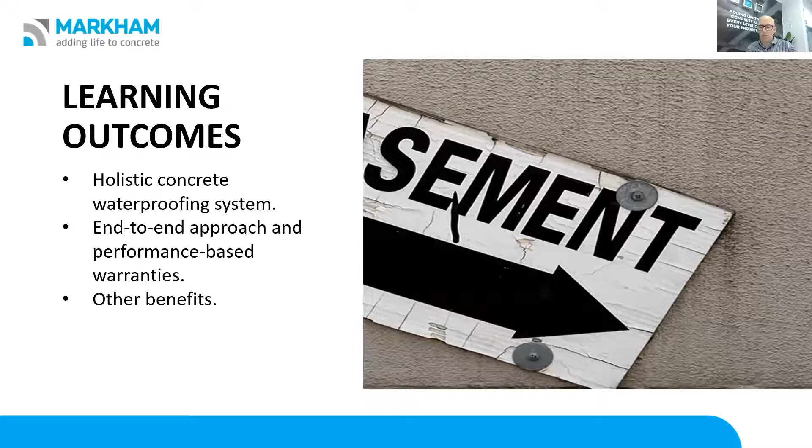So what we're going to talk about today, our learning outcomes will be about a holistic concrete waterproofing system, an end-to-end approach and performance-based warranties, and a few other little benefits there. So Hayden, take us away on some of the challenges we face in the market today.

Yeah, good. To be honest, and let's all be honest, waterproofing is challenging. It's a challenging topic. It's a challenging thing to get right. A lot of times in design, it's a small part of our design, a small part of our discussions. But as a project moves on and gets into its service life, it's often a big part of its remedial work and things like that. So we need to get it right from the start.

This topic's obviously all about basements, and with anything in the ground, we need to think about waterproofing. The cost of waterproofing is big for a start. So we want to put our investments into the right things that are going to give us the best return and best value. Traditional waterproofing systems are very labor intensive and very involved. They generally involve quite a few people, different parties, etc.

And remedial work's often hard to track down. I noticed a couple on the poll said that they've had issues, and I've seen it myself too. It's really hard to see where water's tracking in from and what's actually letting it in. Then there's the challenge of program timing, what's the right system for my build, these sort of things. So it is a challenging topic, and that's why we're here today.

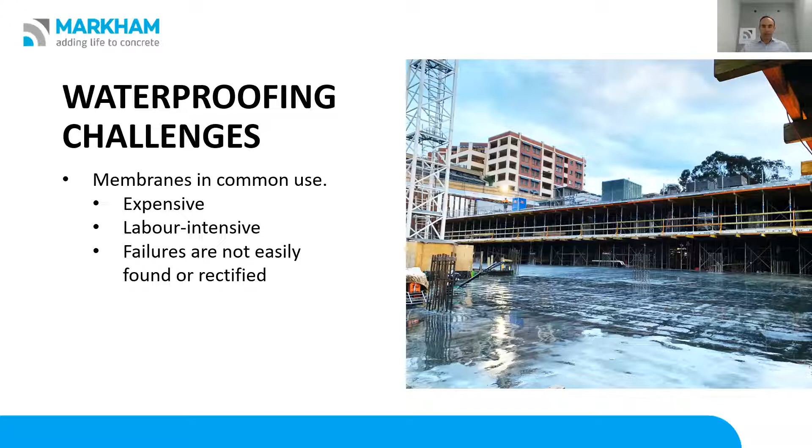So I just want to jump to the next slide. What we're going to show you here is a system which we call BASE-TECT. It's about protecting that basement, and about protecting the concrete itself. Traditionally you've got membranes underneath the slab and up the walls or around the piles, or on the sheet piling, things like that. Now, that is a challenge on its own.

With this one, we work on waterproofing the concrete itself. We're putting an admixture into the concrete, we are applying the surface, and then a simple system, as you can see in that photo, that blue line there, that's a gasket for any joints. That was probably a lift pit or something we were doing there. So that's the system we want to talk about, and it's all about saving you guys time and cost, but getting a warranty guaranteed result.

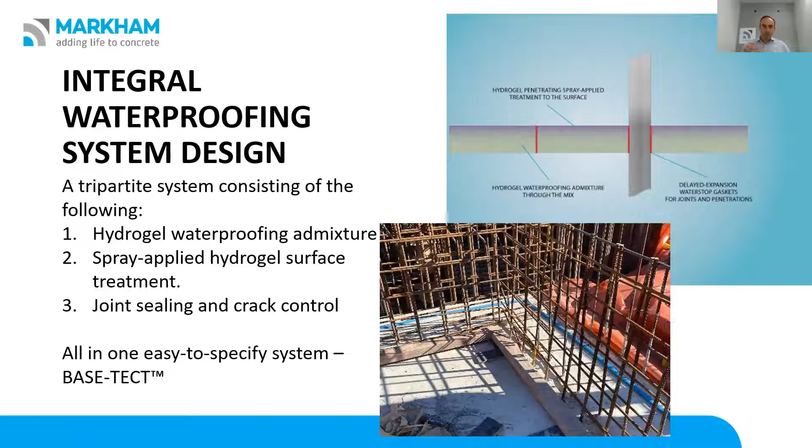So the system comes with a 25-year warranty, and it's very easy to put together from a site point of view, easy to design and easy to put together. So let's have a look at where it goes.

I just pulled up this project because, as you can see in that photo at the bottom there, you've got all the piles. It's quite a traditional type job. It's actually a little bit unique, this one, because they kept the house in the middle. Old heritage-listed project, so they need to protect that.

But see, traditionally you would have had to wrap a membrane all the way around those piles, or spray concrete on to get a blinding layer, and then put membrane over that, and then another layer of concrete. So with this project, what we were able to do is get involved with the team and waterproof the shotcrete wall, one straight run. Obviously, deal with your joints with gasket.

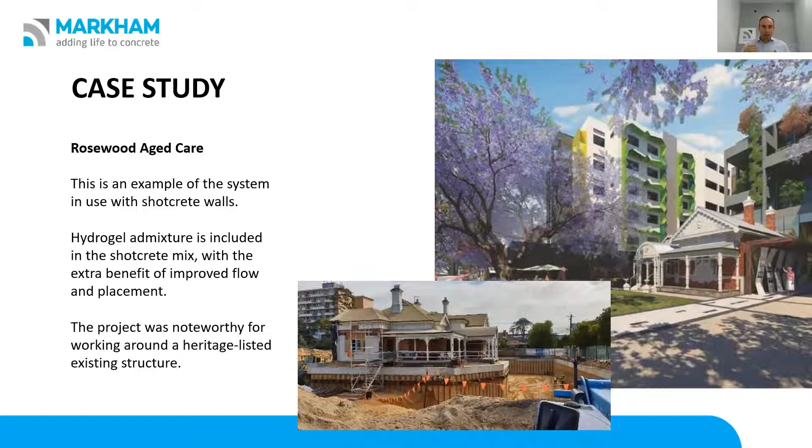Then you can do away with that membrane, and likewise with the slab, instead of having a membrane all the way through the slab and steel over it, we were able to waterproof the concrete, make that whole matrix. So that's one of the many, and I just brought that up to show you a little bit about what's available with this. So that's the system. Henry, you're going to dive in and show us a little bit about the technology.

Yeah, cool. Thanks. Yeah, so what we're talking about here is, I'm just getting some feedback from somebody.

That's right. So we're talking about hydrogel technology here. Some of you might have heard about crystalline admixtures. There's other admixtures out there. But today we're talking about the core value of the BASE-TECT system, which is hydrogel technology.

So it is a part of, or similar to, the calcium silicate hydrate process, which happens when concrete's curing. Basically, the moisture hydrates the cement particle. The cement grows little arms and tentacles out and grabs the aggregate, and that's how we get our concrete strength, or our grey matter of concrete as such. So hydrogels can be spray applied or mixed in at the premix plant, and we're not introducing anything foreign to concrete here that's not already in concrete.

So we'll cover it off a bit later, but that's how we can tick Green Star and different things like that. And basically, in all the research we've done over the last 25 years here at Markham, internally and externally with universities around the world, doctors in concrete, engineers, research labs, that sort of thing, the biggest conclusion we've found is that if you can prevent the movement of moisture in concrete, you can stop a lot of problems.

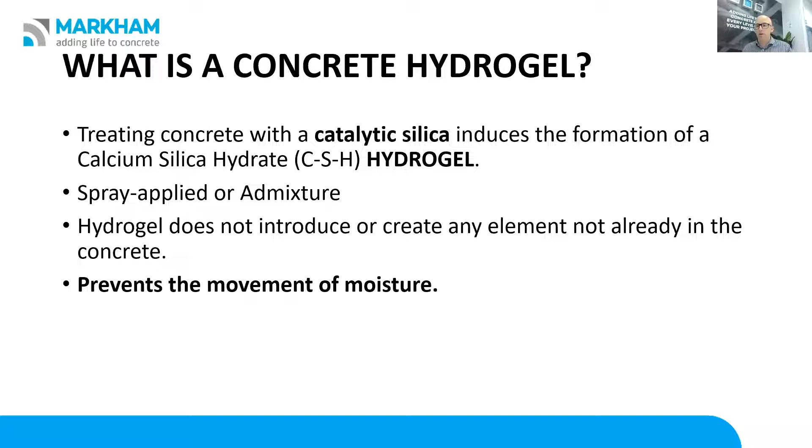So that's how, when we spray apply the treatments to the concrete surface, we can get deep penetration, filling all those voids and porosities and actually transforming the moisture in the concrete into another state. So moisture can no longer pass in and out of that concrete or come through the concrete to cause problems. So we can stop hydrostatic pressure as well. We've had testing up to about 50 meters of head pressure in the lab.

And there's a lot of projects out there that still stand the test of time today where we've done BASE-TECT below the water table, with no tank and membrane and that sort of thing. So hopefully that gives you a little bit of an overview on how hydrogels work. But is there anything more to add there, Hayden, before we move on to Green Star?

You're muted. Right.

I've used online platforms for 18 months and I still get caught by mute.

Beautiful. What I was thinking, there's a few engineers on the call, so the question's probably going through their mind: how does that affect my concrete? How does that affect my strength? Do I need more steel? These sort of things. So basically we can work with any mix and there's no negative effect on strength of concrete. I know a lot of admixtures will suck out the moisture and result in cracking and your strength dropping, things like that.

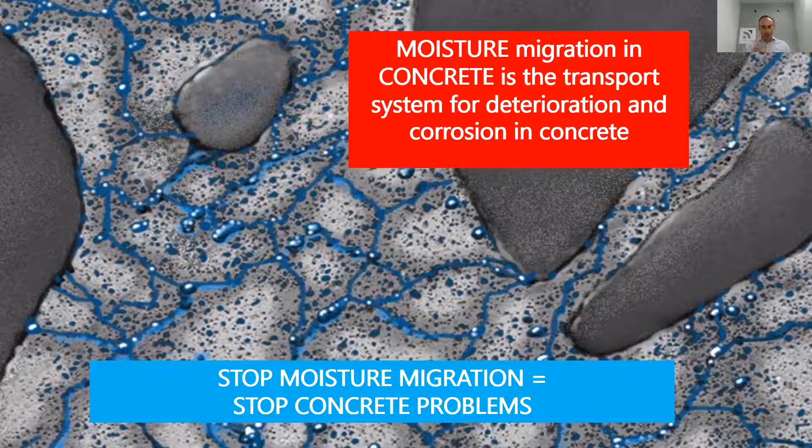Yeah, you might have heard us talk about adding life to concrete or making concrete stronger to last longer. That's what goes in here. It's that invisible strength of building more calcium silicate hydrate.

Yeah, absolutely. So another key part, and this is quite exciting of late, we've just had a suite of our products eco-labelled, which means they're recognised by Green Building Council Australia and New Zealand, and they can earn credits towards Green Star builds. So the key component of this basement system can work towards your design and getting those credits. It's quite a process to get to that point, and it's been good.

Another project here just to show. Centre Group, I don't know if anyone's on this call from Centre Group or worked with them before. Developer, but they also manage their own property. They're involved with this big build in Auckland, New Zealand, and had a lot of membrane specified underneath the basement slabs.

So there's a few things. It was in the water table, program was a big important topic, and there were contaminated soils. We got involved with Centre Group and looked at ways of waterproofing the slab. It was a 300 millimetre thick slab all the way through the basement, about 20,000 square metres across 2 buildings, and we came up with a design where we take away the membrane totally and waterproof that whole slab with the BASE-TECT system.

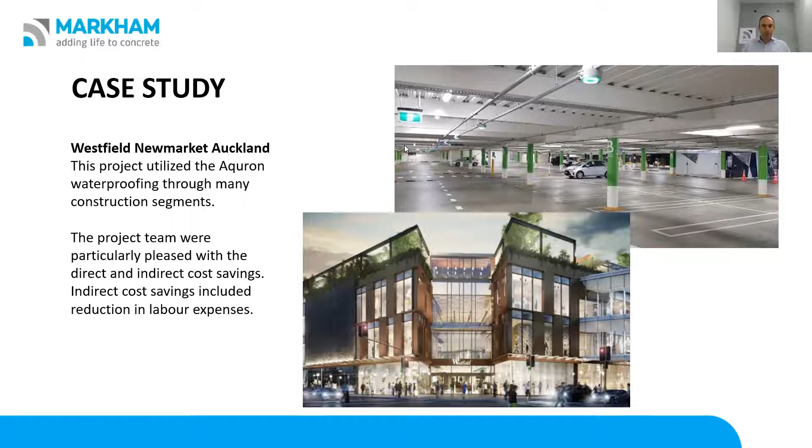Cool. So thanks for that, Hayden, on that project. So now we want to talk a little bit about our end-to-end service. So effectively, we're involved from design right through to installation. Being the manufacturer of the product also here in our head office, Napier, we've got a lot of control over stock and that sort of thing.

But we work with the architects and engineers at the early design stage. We talk about their design. Is it a shotcrete pile basement? Is it a precast stitch, or is it an in situ pour? What's going to work best? And we take all the homework and the findings we've found in other projects and can give recommendations, pull your plans out and draw on them and say, right, we think some gaskets should go here, here, and here. And basically guide you through the design process.

We can also help with council. So we've got technical letters we can put with your PS1s to go to council. And then we get to the building stage. We work with the ready mix plant to make sure the admixture's mixed into the right concrete. And when it turns up, we get that QA information from them. We also install any gasket, and QA and check it off before any concrete's poured. We supply and install the curing and the penetrating spray applied sealers as well.

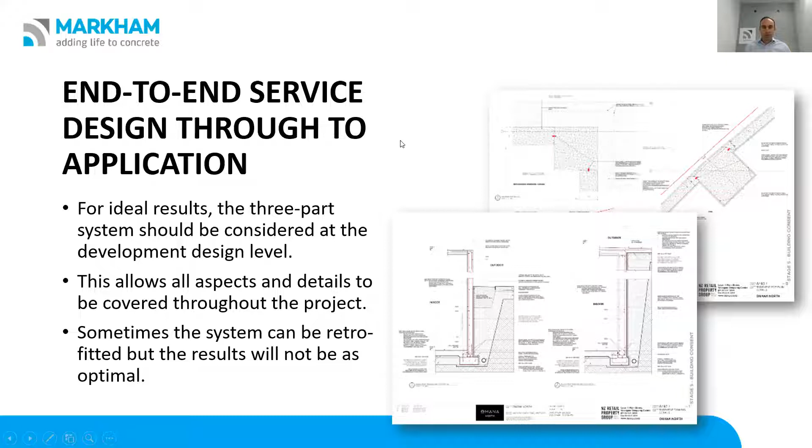So being able to offer that product design right through to actual delivery with our own teams on site, it's for you guys. It's to offer that peace of mind. It's to offer that one package, one neck to screw, so to speak, if something goes wrong. So it's all on Markham.

Yeah, that's good. And that leads a little bit more into QA and performance-based warranty. You can see down the side here a quick snippet of how we can do live QA. Our applicators have apps on their phones and tablets, and they can transfer that information live back to our head office, and after each pour, after each application, we can send out a report to say, right, we've done this many square meters from grid line A to B. There's this many cubic meters dosed with the hydrogel technology. It was cured with this. Here's the photos of the QA. So we look after all of that.

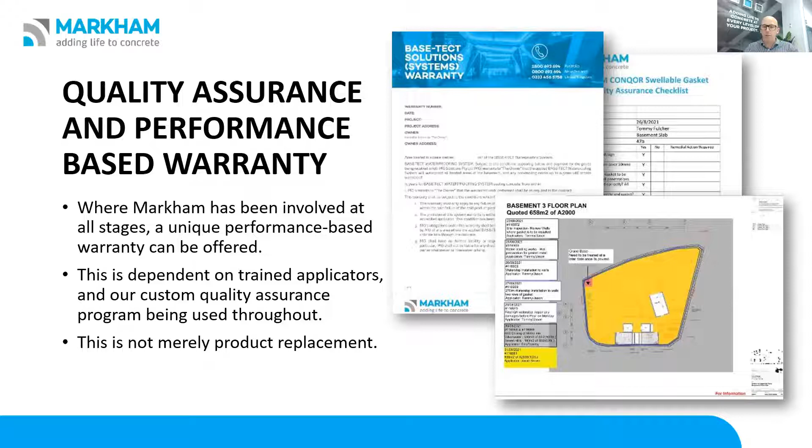And then performance-based warranty is something we offer as well. So it's not just here's another part of the product if there's an issue. We will cover it for that 25 years. There's a 2-year maintenance plan in there. But basically, if there's a moisture-related issue in your concrete or in your basement, we'll come back and cover that off. So we're very project-focused. Every project is a little bit different, but in essence, we're adding a performance-based warranty there for you. Tell us a little bit about compatibilities, Hayden.

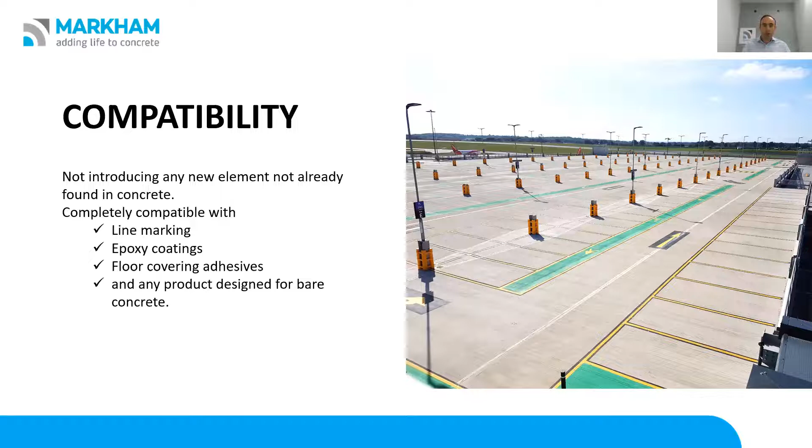We're creating more of the calcium silicate hydrate. It's all within the concrete. It's a penetrating sealer and an admixture, so there's nothing on the surface. And our warranty is if your product is compatible with concrete, it's compatible with our system. So that means there's just absolutely no hidden costs. There's nothing escalating at the end, not causing the need for grinding, not causing the need for preparation, things like that.

So let's have a look at this. It always comes up: okay, what if my concrete cracks? And it's true and valid and the biggest challenge with any concrete structure. So the thing before that is to be proactive with our approach to cracking. What's the mix design, what's the pour layout, what's the depth of the pour, what's the steel? It even goes down to curing; our product is the curing. So all these types of things go into a design.

It's right through, and even if you get a bit of breakaway, if you get a bit of spalling, if you get a bit of gouging, a contractor or whatever comes on and gouges it out, even if you get a little bit of cracking, it's very unlikely that you'll get cracking right through or damage right through that will take away that waterproofing effectiveness. So just wanted to show that there.

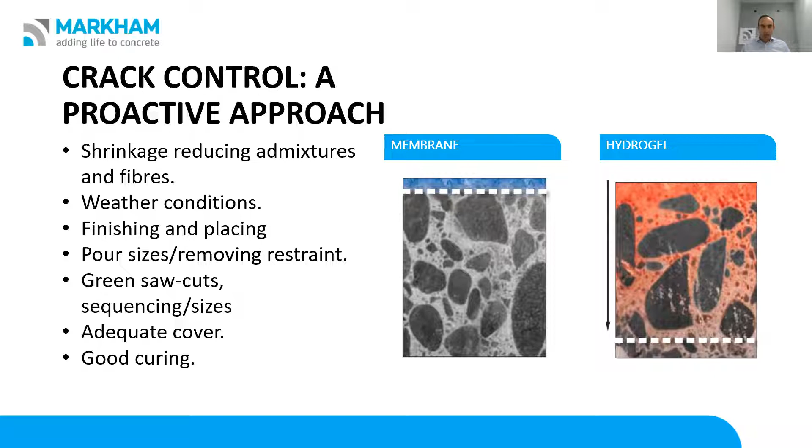I trust that makes sense. Does that make sense, Henry? Yeah, that's good. Definitely. Moving on.

Yeah, so another area is carbonation. Obviously basements get a lot of traffic in them, and vehicle fumes cause carbonation, and it actually breaks down the concrete surface, so it gets into the porosities and starts breaking it down. Now with hydrogel treated concrete, it protects against this. We have an anti-dusting warranty. So basically it can't get into the concrete and can't start its cycle, so that protects your surface. Same with soffits or walls, or slabs; they're protected long term.

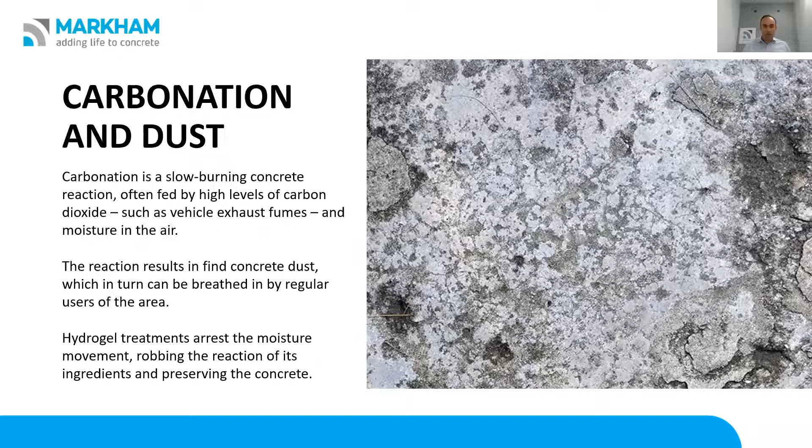Now, if that was left unprotected, mixed with a bit of moisture or water that traffic brings in, it's very, very damaging to concrete and starts the corrosion cycle. It's basically like an acid attack. And that image you're seeing now, you've probably all seen something similar on untreated or low-grade concrete over time. So you're really getting a few benefits: not only waterproofing, you get compatibility with line markings and all that, and then you're getting protection against carbonation, you're getting anti-dusting, those sort of things. So it's really your final finish with the system.

So yeah, we've been involved with this a lot, but tell us how we got started, Henry. Yeah, thanks, Hayden. So just taking a step back from BASE-TECT, in 1997 there was a project in Christchurch. It was a basement built with a tanking system beside a river, under hydrostatic pressure, obviously. And as things do happen, I'm not sure of the full details, but there was some form of failure in that tanking system. So straight up, the builder had a dilemma on his hands trying to fix water under hydrostatic pressure getting into this basement. There was about 200 to 300 mil coming in there. They could hardly pump it out fast enough.

So we came on board and spray applied. We retrofitted, if you might say, to the concrete from the inside of the basement. We had to pump that water out. We can spray wet on wet, so as long as there's no puddles there, the penetrating sealer still penetrated up to 150 mil. We self-healed about 1,000 lineal meters of cracking up to the 0.5 mil threshold. And there was about 150 to 200 meters, I think, that was above that threshold that we had to inject. But the awesome part was that we waterproofed this basement from the inside.

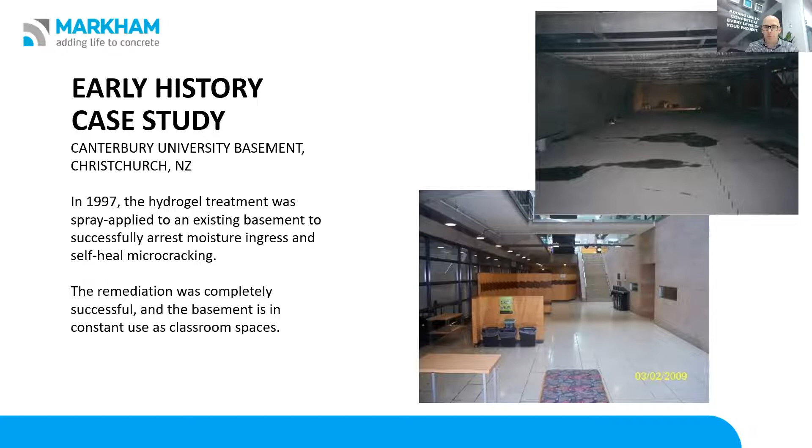No, it's good, but it does show, it's not only if you have got, and we get involved with this quite a bit, retro-treated systems, if there's some seepage through a wall or something, obviously joints and everything's slightly different, but there's ways of doing it. And exactly what you said, that taught us to, hang on, why don't we offer it right from the start? So that's good. So we will jump to questions now.

And there's a couple of questions in the chat there. Can the product be purchased only? Well, with the BASE-TECT system, it's a hard one because basically, no, it can't be. Because we're adding these warranties, we're keeping control of the QA, we're doing the install, all that side of things. If we just put the product out there for Joe Blogs to go and put it in, we've got no control over it, and we can't give those long-term warranties.